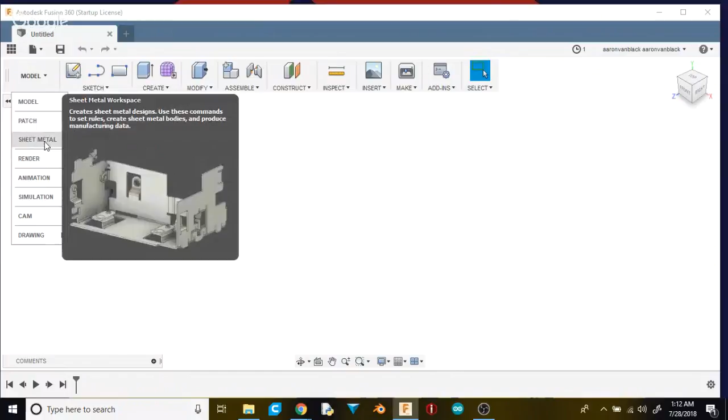Yeah, see, because I've got this up here that I would usually do if I do a new design. So let's see, nope, that's not what I want. I usually don't do any other thing except for usually just making stuff in Fusion. So I'll go ahead and create a new sketch.

This over here. Sketch, yeah. All right, I'm hungry, sorry. What's wrong with that, baby guy?

I know you can have it set up so it should pop up between who's talking. I don't know if that's got to do with a weird setting. I didn't see it doing it before, but I haven't seen it that way to begin. So...

I stopped feeding him for a second. He was very happy, it says feed me. I do like being... my mum said she doesn't feed me too soon, she waited too long between mouthfuls.

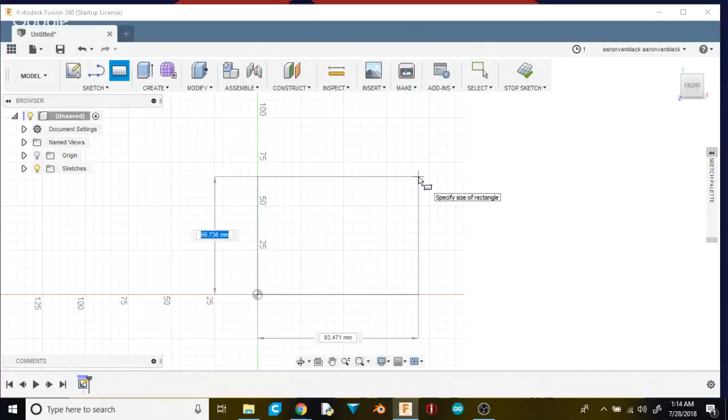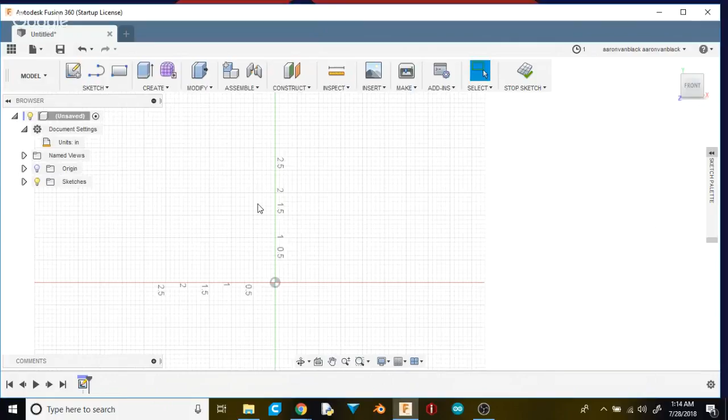Well, let's see, I don't have the dimensions written down. I actually had it in one of the previous ones. Well, let's change this actually real quick. I'm doing the right one, I can change it. from millimeters to inches, exact inches, there we go. All right, I'm gonna pop this up.

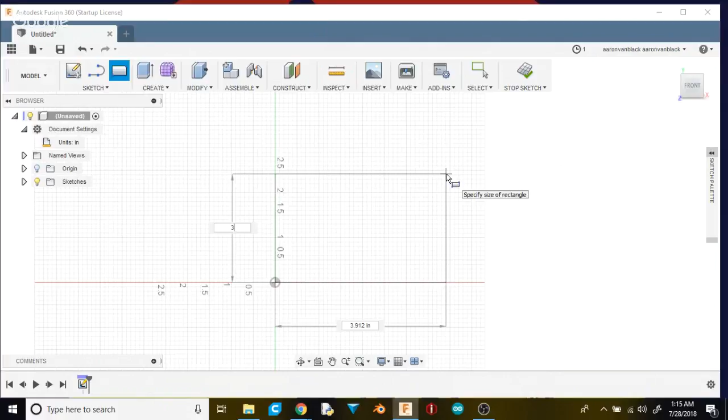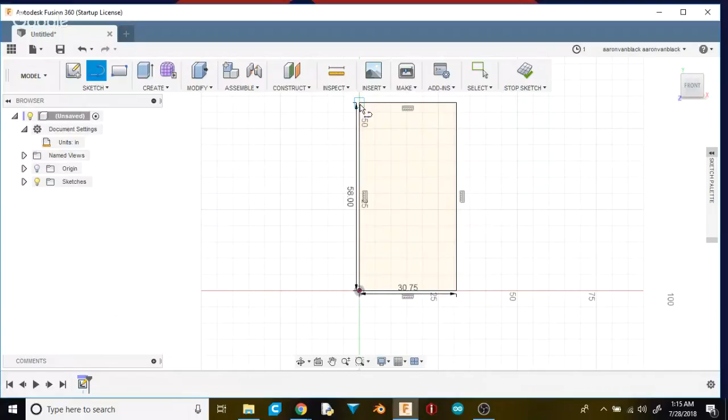I want, let's see, 50... just say 30 points. Back, one's 30.75. This one's going to be, it's called 58 inches. Now, just got to line over, 30.75.

Yeah, it's definitely weird for me to use inches with this because I've done so much of not using inches. I usually stick with millimeters, mostly because everything I make is a lot smaller. So anytime I go to make something bigger, I always use my phone or something and ask it how many millimeters this is, if it's bigger than my caliper can do, which I got.

Usually I don't do anything that big. So let's see, the highest I can go, this is technically 6 inches, but my caliper is a little broken, so I can't take it past that. There's a little piece in the back that came off, which I need to design and print just to have the piece.

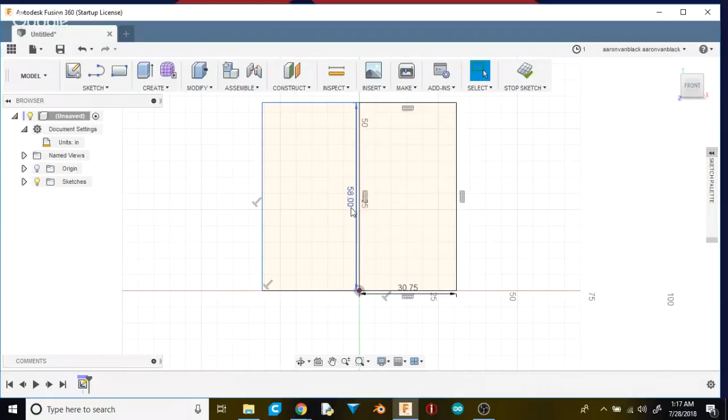All right, so I'm going to have this up here like that. Got it to the size I want, which looks a whole lot taller than what I'm thinking. So let's take it down to 55, make it a little easier.

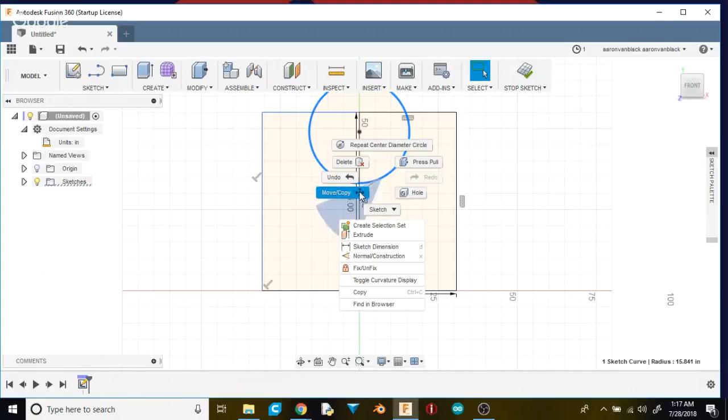One nice thing is hit C for circle, get on this center line, and let's do that. Tell it to move, and take it down to there.

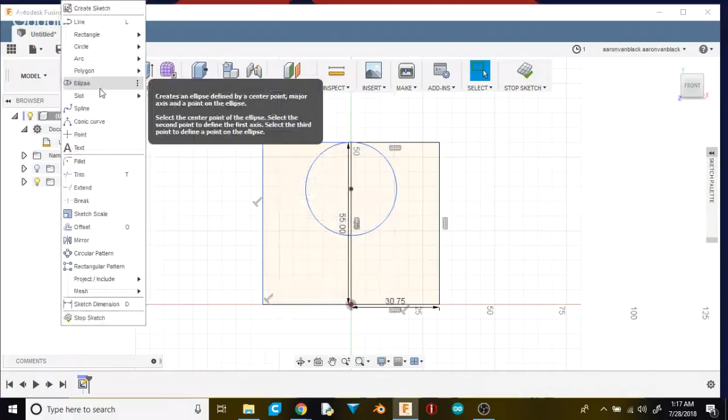Now, what I like to do is whenever I want to do some weird curves, I can either obviously do circles, or I go in and do spline. So I'll go in, click a couple of times, and find a spot to just connect with spline.

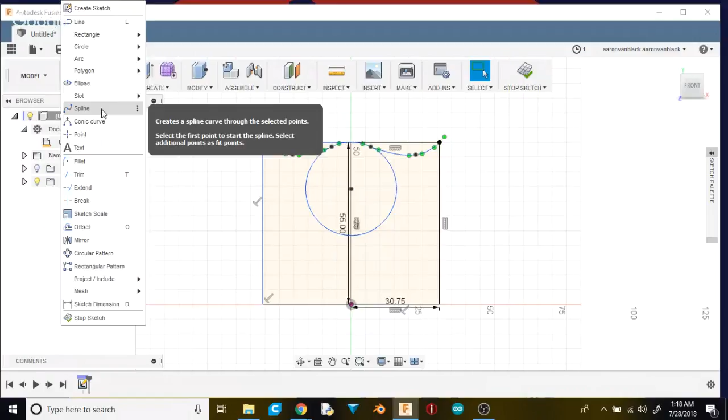Interesting. Yeah, it's pretty handy to do it that way sometimes, because often using spline handles can become a bit of a nightmare, especially if you're trying to do certain tangents. Yeah, I can agree with that.

All right, let's take this over 12 inches. I always like to do the same here, which is super nice that I can sit there and just— oop, that's not what we want. I hate when it does that. So usually when I go and add something and it moves, I tell it to fix. 12, there we go.

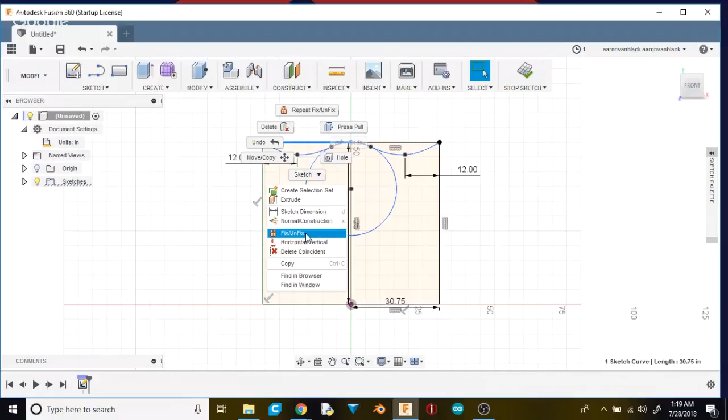Let's go ahead and just fix this and this. I know there's a whole bunch of different ways. Angus, if he sees this, he's probably just going to cringe at things I do.

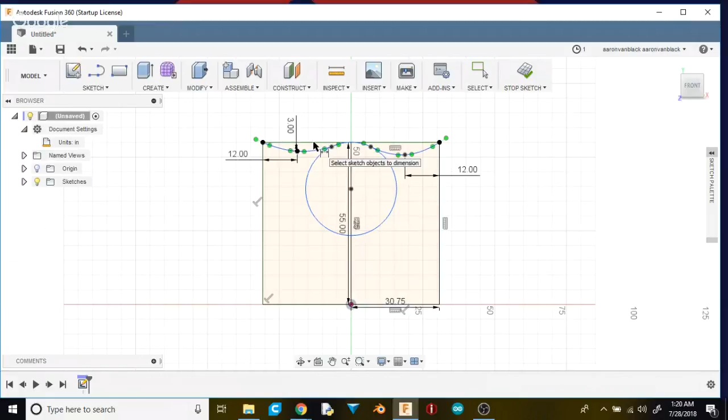But not all of us can be as good as Angus, so let's take this to 3 inches. I'm no expert when it comes to this, but all the stuff I do is very simple, and it might not reflect actual skill levels. You often do hear him say, you know, this is probably not the best way, there are other ways to do it, it's just the way I do it.

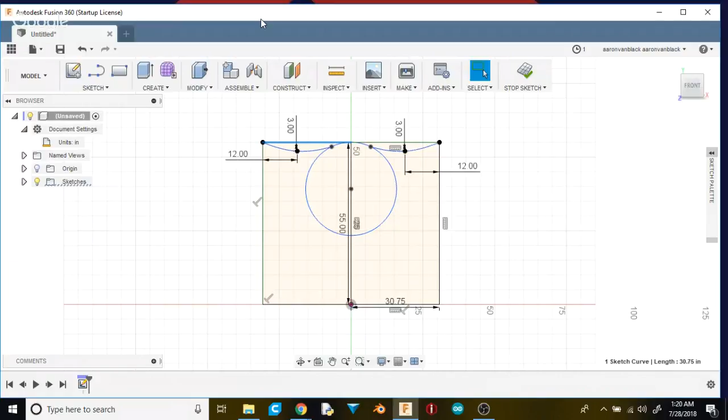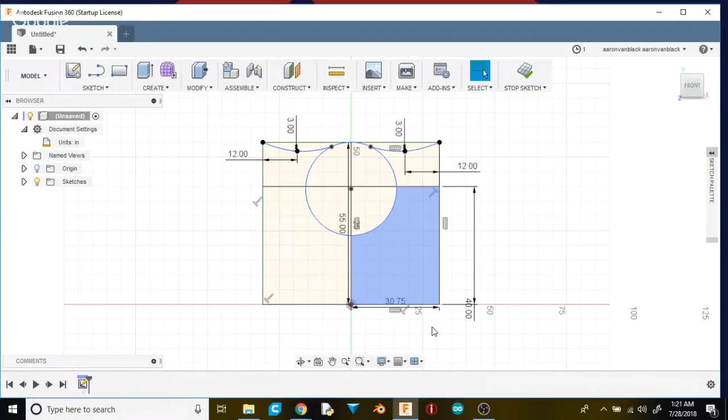Oh yeah, and there are so many ways, as we said earlier, to just do something in Fusion. So I think no matter how good you get at something, you're always going to find someone who's better. Yeah, that's why whenever Lars puts up a video, I always watch it. 90%, maybe more, maybe 95% of the stuff that he puts up, I already know, but it might just be 2 seconds of that video where I'll see him do something and I'll be like, holy shit, why haven't I thought of that before?

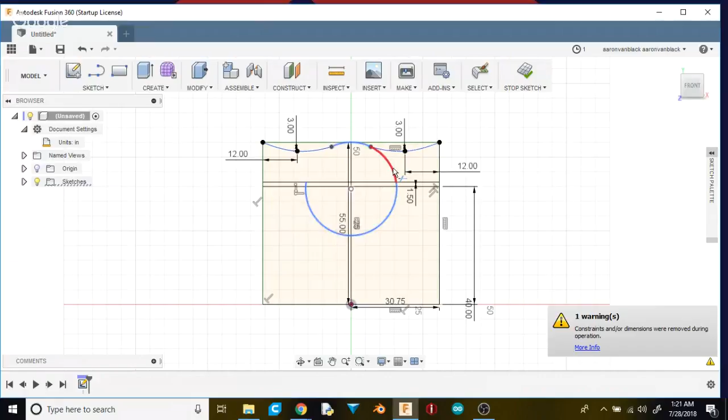Yeah, one thing that I had discovered that I hadn't learned, which was kind of nice to learn, is when you select something and say, I don't want everything, I just want this up here, guys.

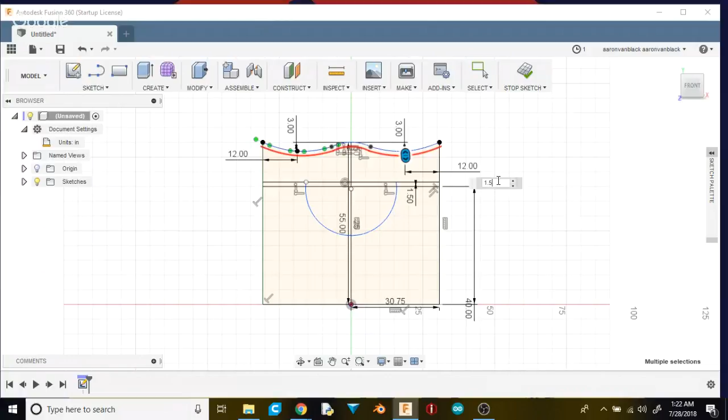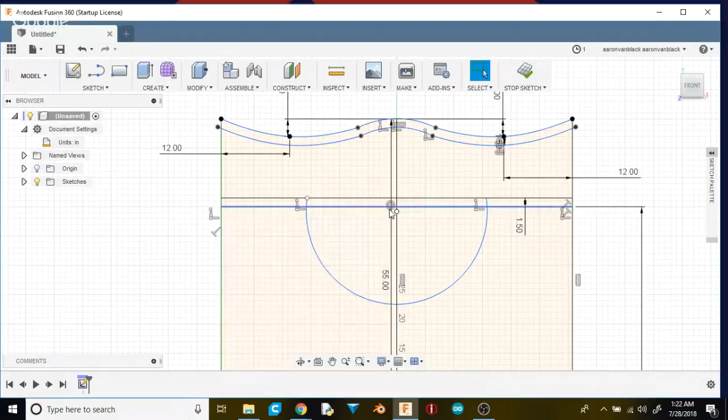I hit O for offset, and I just take it down. I'll select it, and it can give me the exact setup and distance that I want, which is super nice, because here I did a line straight through, but if I were to just select it and then hit O for offset, I can make that go a lot faster instead of doing what I just did with the line there. So that's one thing to kind of go through and try to remember for Fusion.

I mean, there's a whole bunch of different things that other people can do that not everyone can do, so I know there's that challenge to it.

Not everyone can do the exact same thing as the one before. One person can do it one way, one person can do the other, and then you learn something else.

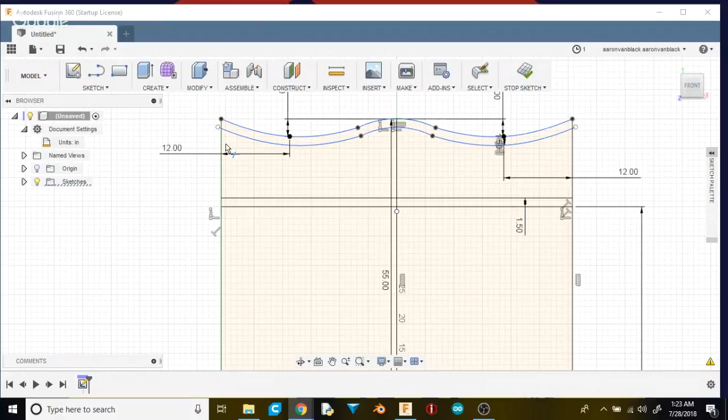One thing I've noticed with offset: if you scroll up, you can see right here this sticks out. I can hit T to trim it off, and it does it, but it's just one thing you've got to factor in when you're trying to do something.

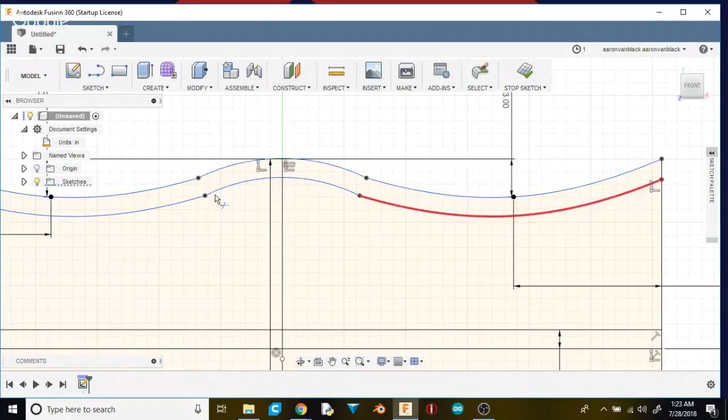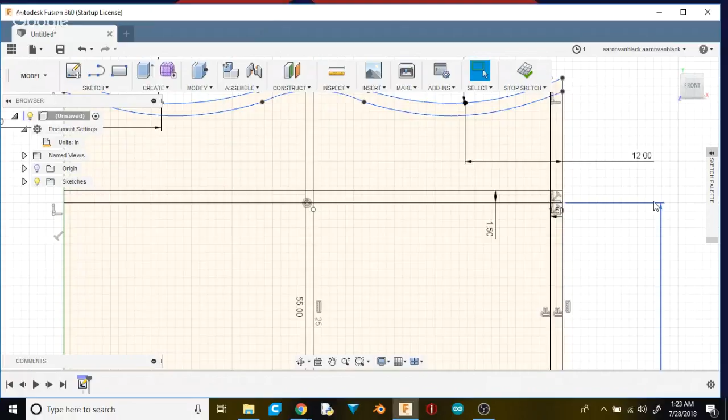It will. Like they often find the really spastic things that normal lines don't do. Just like that, you move it and it'll change shape despite the fact you haven't actually done anything. Yep, and I'll be damned if I can figure out why. And it doesn't do it on all of them either.

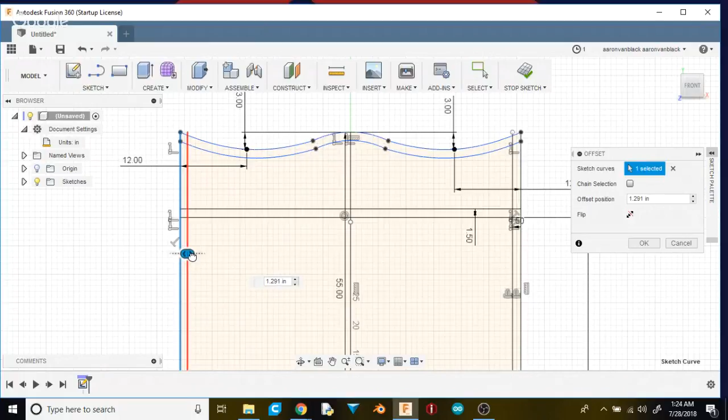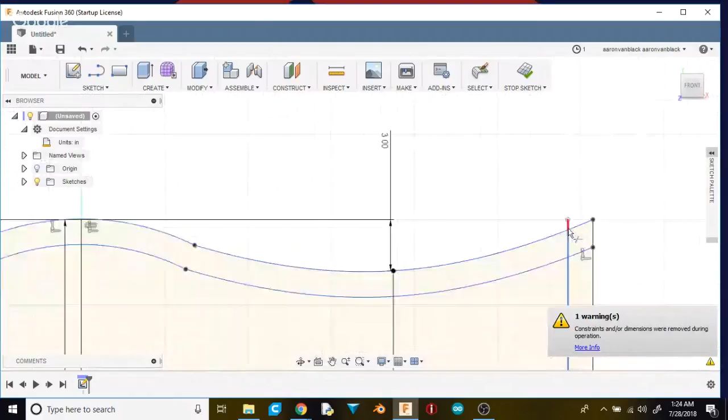Just occasionally. Like when I was working on my ring, I had this line that went from base to the hand and just arched down onto the top of the ring. It's only like a 3-point line, and only maybe 3 millimeters long. And I could not figure out why the sweep or whatever I was trying to do just would not work.

I figured out that if I went into the menu and changed the type of sweep from what it was by default to the other setting, which isn't what I wanted, it still wouldn't work, but then if I switched it back to the one I wanted, it would just instantly pop up.

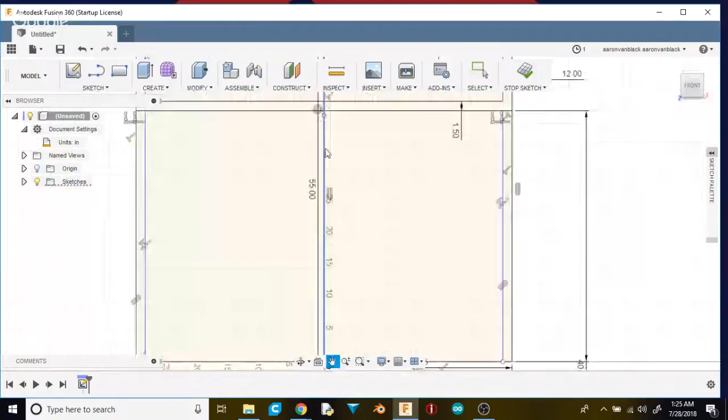And that took me like 3 hours to figure out. I'm like, why can't I switch this tiny little spline? All I had to do was switch the mode from what it should be to what it shouldn't be, back to what it should be.

I've had issues where I go and do something I've done before, and when I go to redo it, or if I messed up and tried to redo it, it won't work. Like for offset, it just won't work. I mean obviously it's working, but sometimes when I'm working on it, it won't work for me no matter what I do. It drives me absolutely nuts.

I just did this. And in Blender, I've had the same issue. This was years ago when I used Blender before I got into Fusion 360.

Another thing - in Blender they changed the interface from when I had started using it. This new update has tabs on the sides and stuff. We've got our stuff up here, but imagine everything being over there instead. You've got your tabs and you have to figure out how they drop down. Let's open Blender and I can show you.

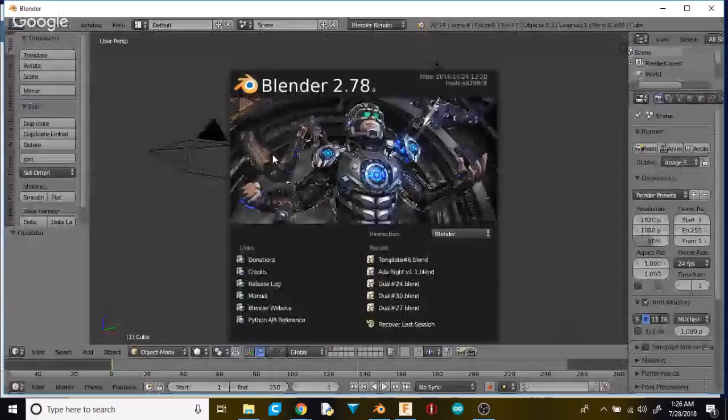See, here's all these here. You can scroll down, and this over here is pretty much the same, though there's a couple different things. There's all the hotkeys, and when I tried the hotkeys for this in Fusion 360, my brain was like, well, this button - no, this doesn't work.

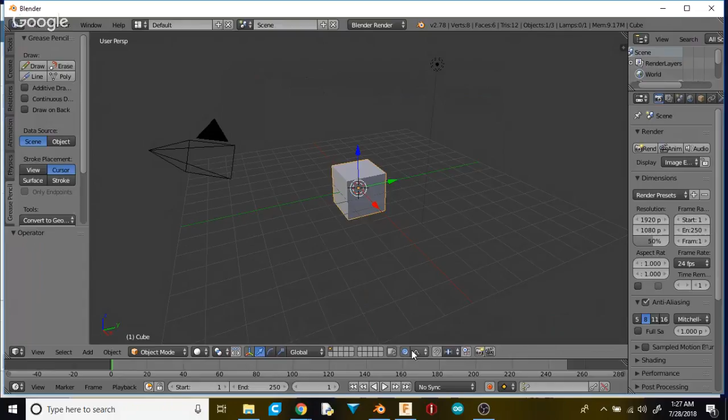Let's see, hit spacebar - this is what happens when I hit spacebar. Let's check Fusion 360. Exit there, spacebar.

Mr. Carrell Science, I think your baby's getting way too into this tutorial. Teaching them from a young age. There you go. Show me those fillets, baby. Oh yeah, stand for it, mama. I'm glad I'm not monetized. No, it's okay, it's a real thing.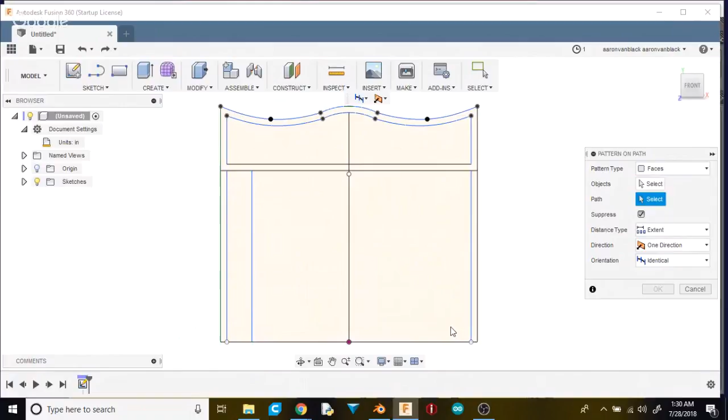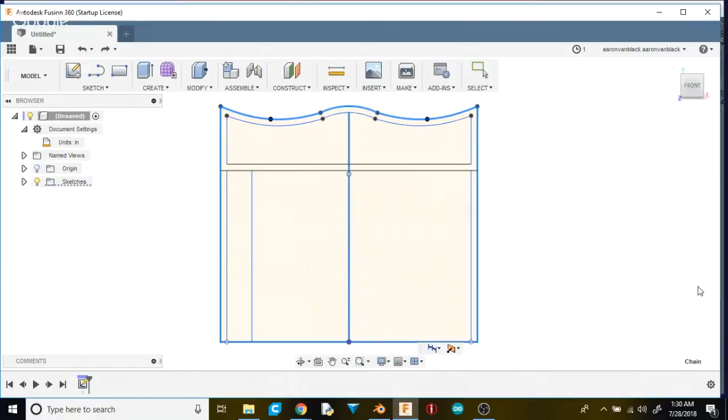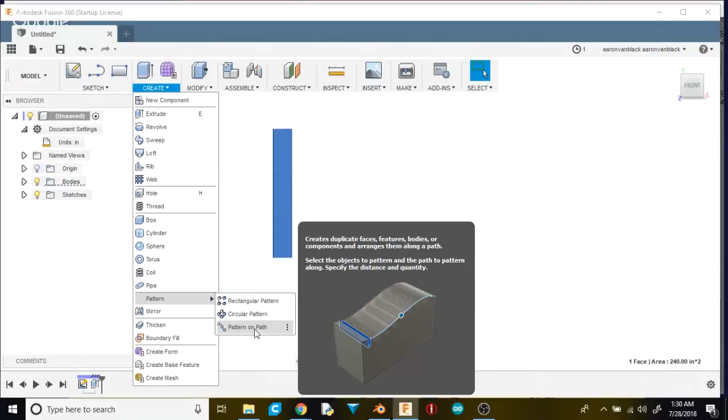I did it on a path. The one under the create menu won't work in the sketch environment.

Sketch. You said line? Rectangular pattern. Right out of the line. It's a rectangular pattern, grayed out, right down the bottom.

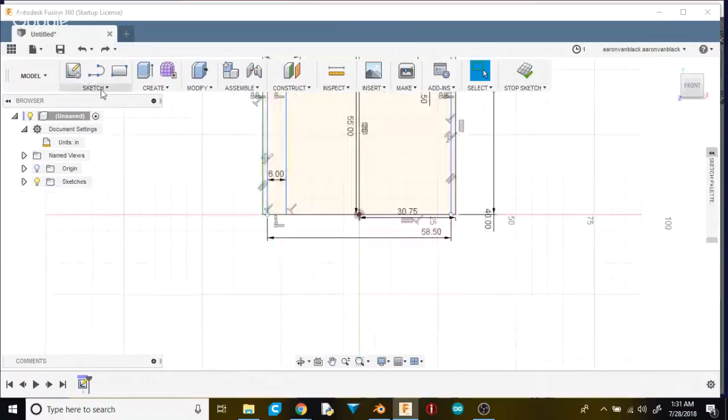No, like at the bottom of the main menu. Almost there. Okay, yeah, let's sketch environment with that one. Remember you sketch there.

The other ones under create don't work, and I fall for that all the time. I'll go to like fillet at the corner in a sketch and I'm like, what, isn't this working? The model fillet tool.

Increase my count, should be close to 10. And I think this isn't... yeah, that's way too small.

8. No, that's still too big. All right, let's put that. No, let's try.

What's that? Formulas, very much - no, a lot of it is I go through and trial and error. Usually depending on how big of an area I want, I'll just see what it's going to do. I usually play around with that, then the sudden realization that I can just do the maths to calculate the exact thing that I want, and I'm like, I just wasted 15 minutes playing around with this to get it exact.

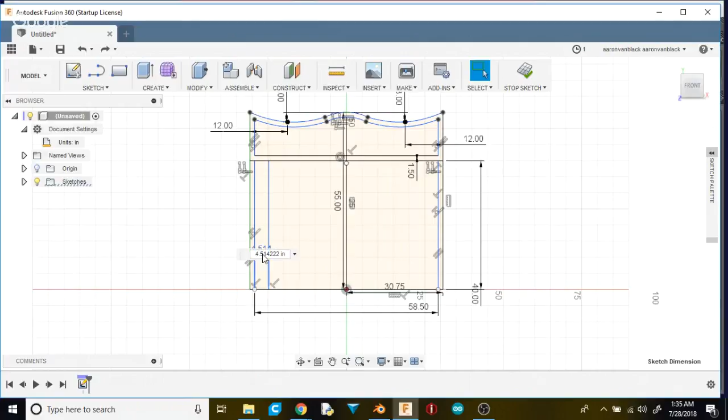So let's see, that's a lot of things that I go through and do. I'm trying to figure out how big one thing should be for this, if I'm going to add something, then just kind of see which one's going to get me the closest to it. So let's go.

Add 9. Yeah. It looks fairly close. And I know they're not the same distance just by looking at it. Yeah, it's 5, so let's see. Change that to 5.

But then that's changed there, so then I gotta go back. So let's go. This one's coming in handy in that situation just this morning, trying to remember what the hell it was.

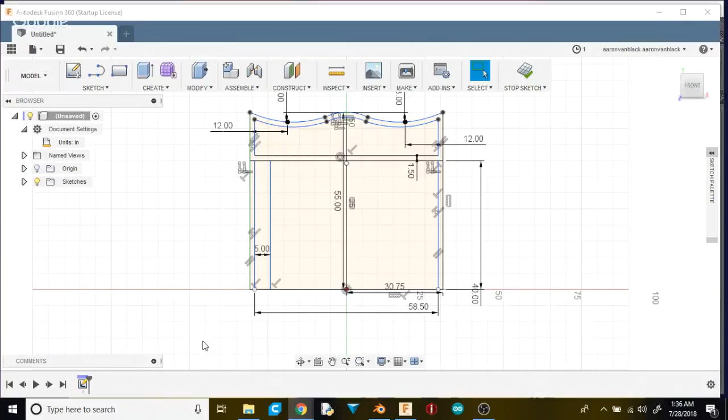So why don't you just make that first one 5.85? You're going to do 10 of them. Yeah, well, and then do your pattern and just do 58.5 minus 5.85, and then set that as your distance when you draw your pattern.

9 more. And then when you draw out your pattern to the distance, do 58.5 minus 5.85, and you just manually type that in as your distance.

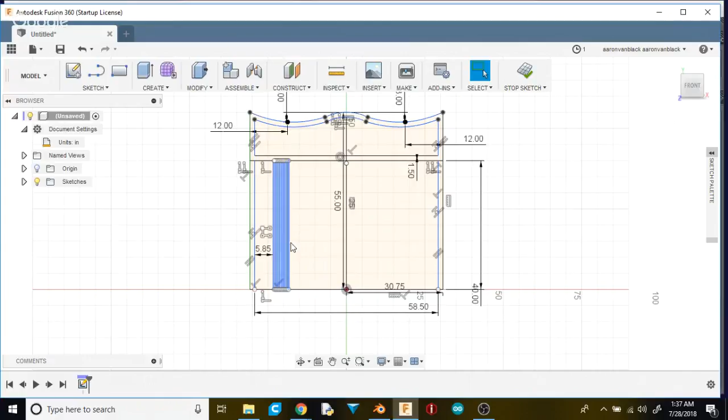I know, I just screwed that up. All right, let's try that again. So, 52.65.

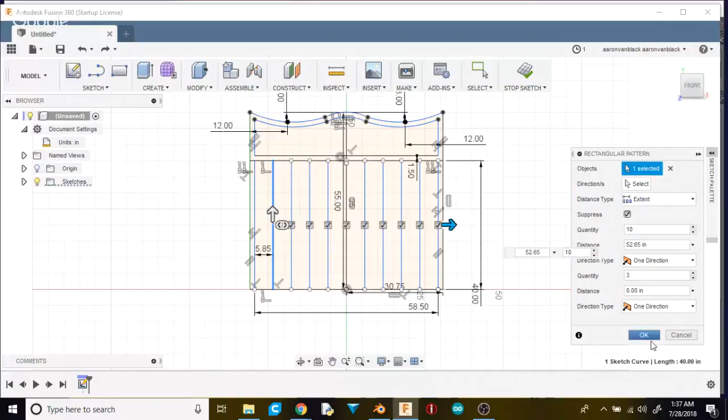Let's see. Yeah, good.

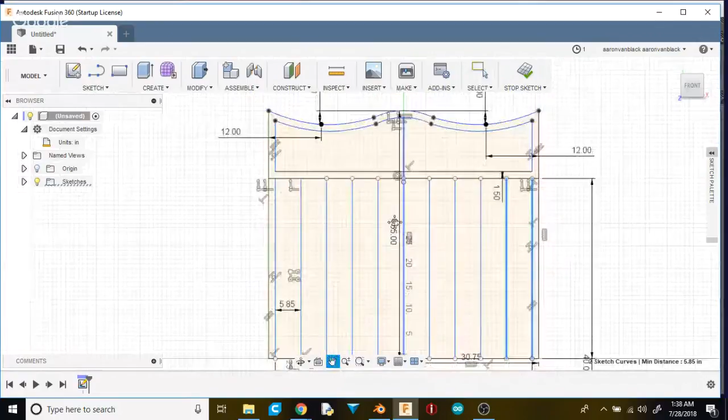Section, and it kind of automatically applies that to subsequent sections.

Let's see, I'm gonna select, shift, every other one, extrude that 1.25 out.

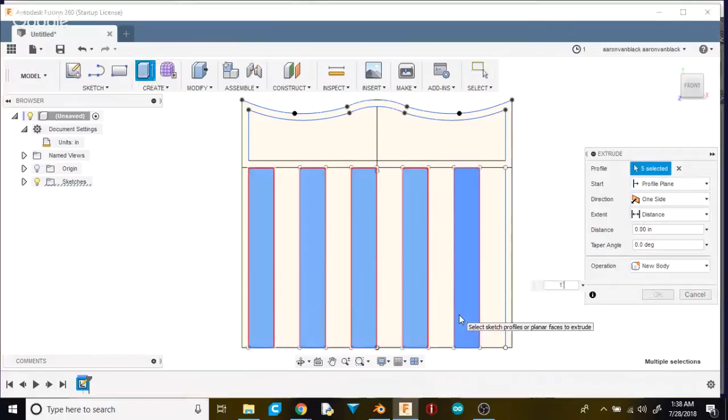So I'm gonna go back and edit my sketch. Extrude that 1.5.

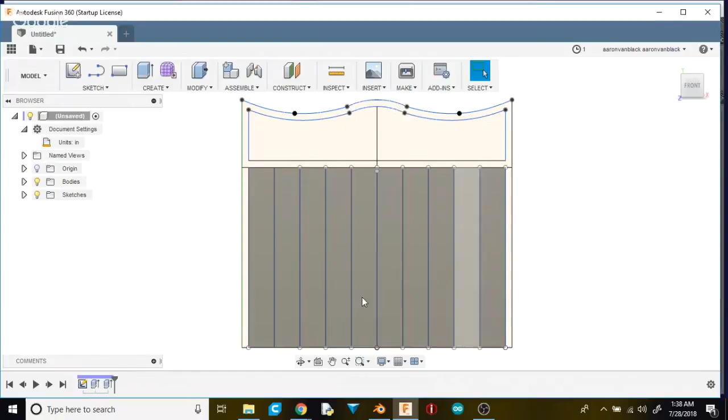It kind of does, doesn't it? All right, let's see.

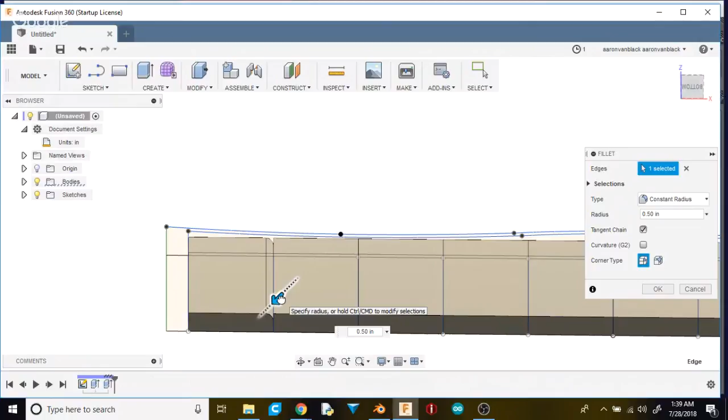I was thinking more Transformers. Yeah, see that. Kind of funny how people see different shapes, or the same shape, like when you look up at the clouds. Yeah.

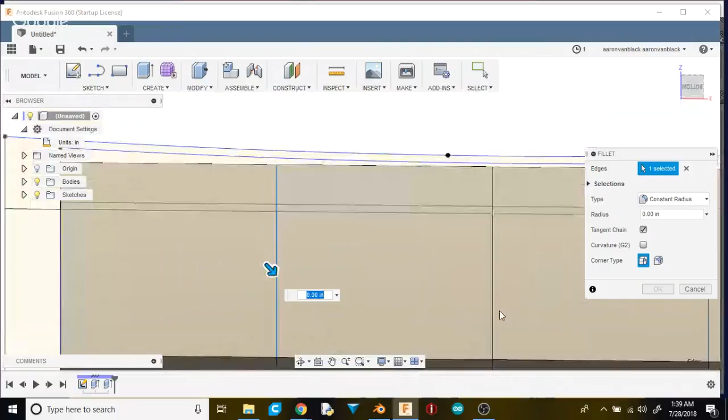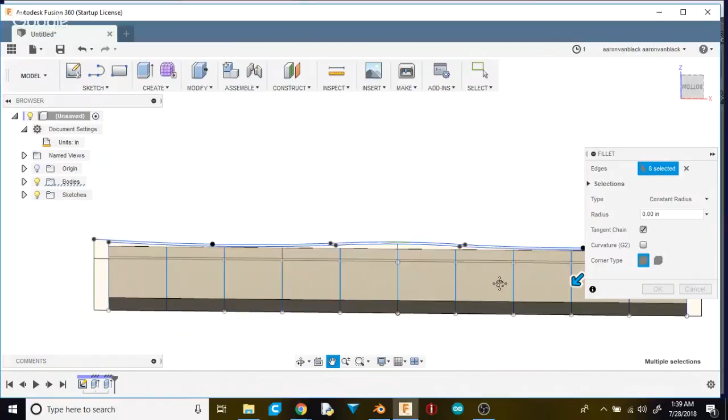Yeah, but as soon as somebody says, oh, I don't know, I see that, you're like, oh, totally. Then when people say that, oh, I see that in that cloud, you're kind of like, really?

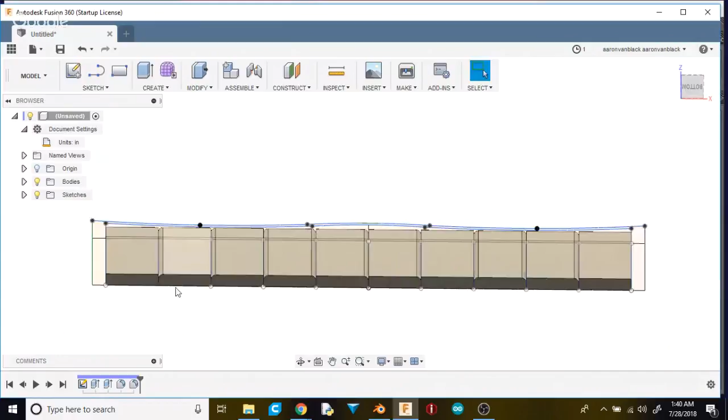All right, so fillet again, and I know there's some other way to get this done a whole lot more efficient than what I'm doing, but see, like right here, it added a fillet, and I didn't want that fillet there.

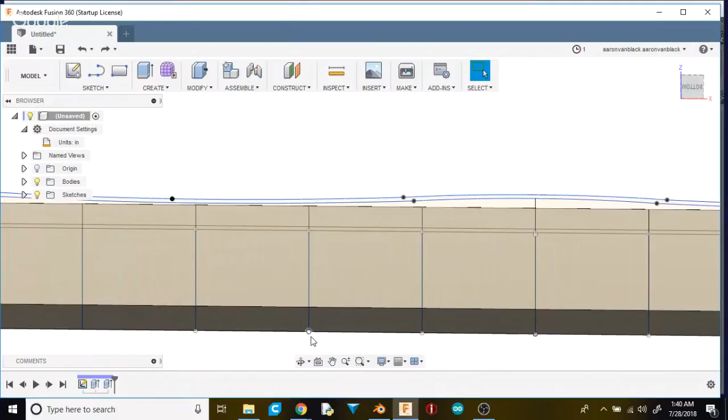There we go, let's go fillet. Just want the top part, just tend to uncheck the tangent chain button. Which button you said? Tangent chain. Tangent chain.

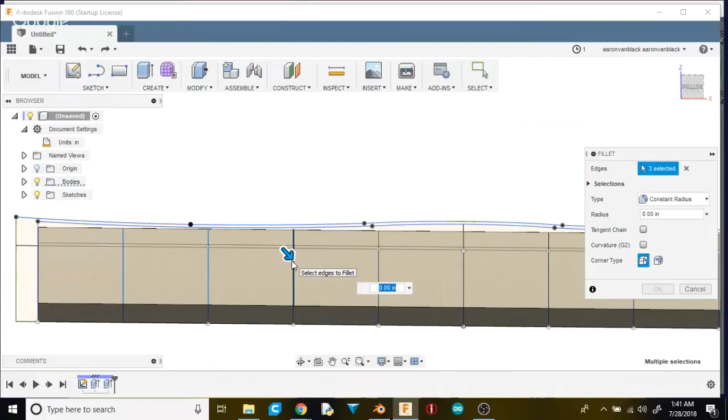I'm looking, my brain - I've been going on like 3.5 hours of sleep right now. So, the ticked box, okay, that'll only select one edge rather than all the edges. Okay, well, let's try that again.

And see, there's a lot of things I obviously still don't know. It's like I run across something and often you don't really know those things because a lot of the time you go to select something and select that.

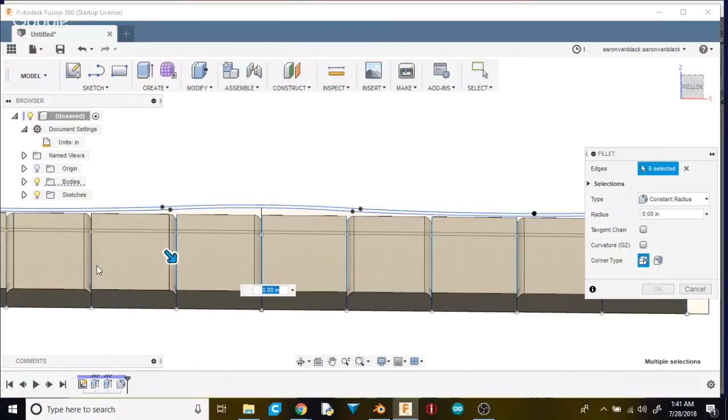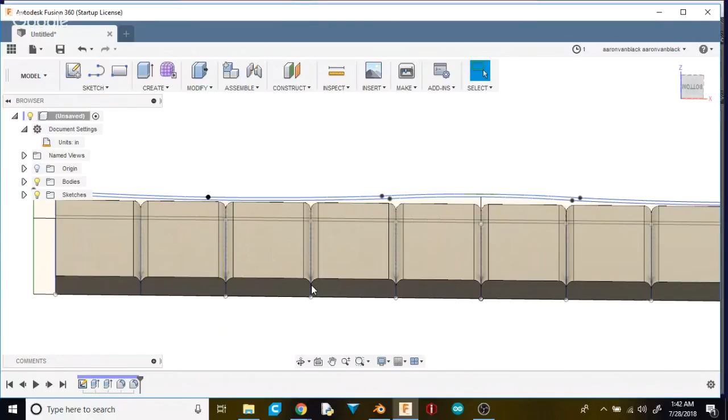Oh yeah, you never needed to not select a part of something, you never even think to uncheck. Normally if I do something close to this, I usually sit there and have a gap, look in and do my sketch so there's a couple millimeters apart from it, not have this entire thing going through like that. So there's that, look at it.

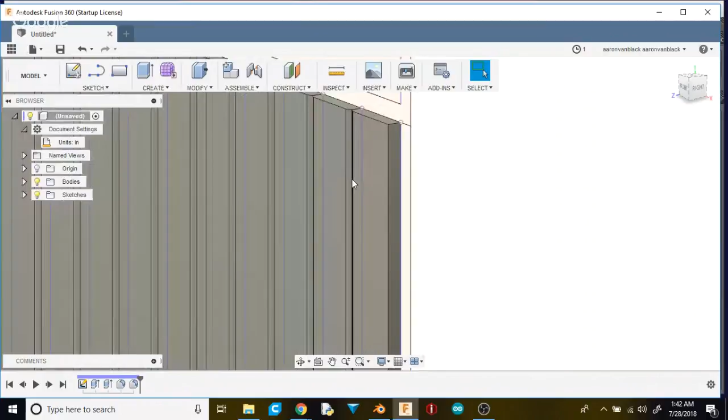See all that now. Oh, that's good. So let's go front view. I don't know why, but for some reason that just made me think of

Tim the Toolman Taylor talking to Wilson over the fence. Oh, that's funny. That's a memory I never thought I'd have again. Glad we can make you relive that moment.

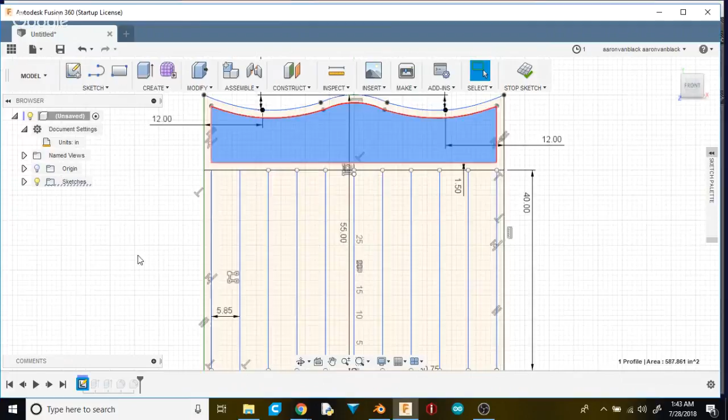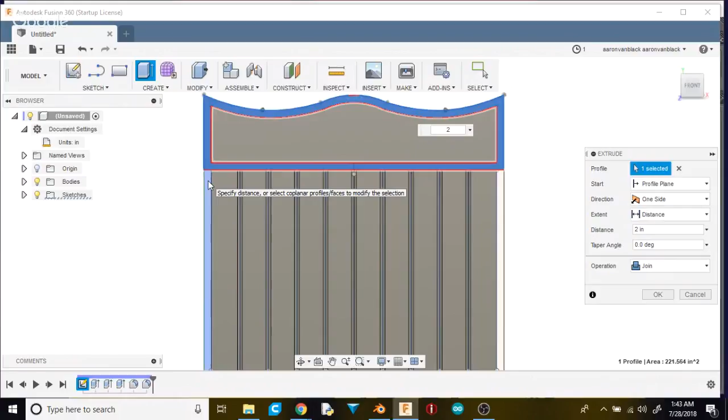Have you ever delved into some parameters? Oh, possibly. There's a lot of things I've done and not done, can't quite remember everything that I've done.

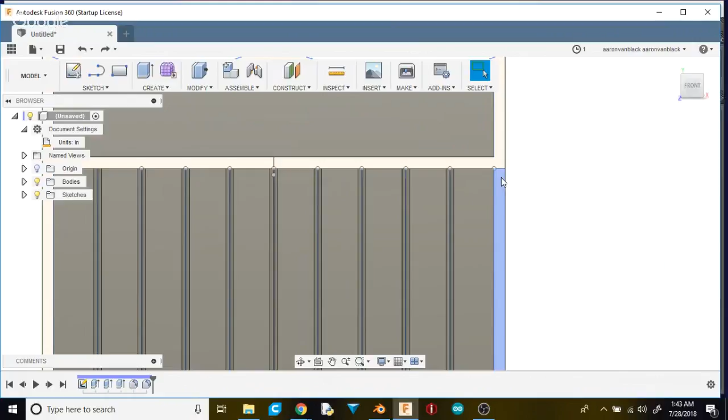No, I want that. I'll edit sketch first, I guess. That's not allowing me to do what I want to do. There we go, now extrude it. Take that out 2 inches as well.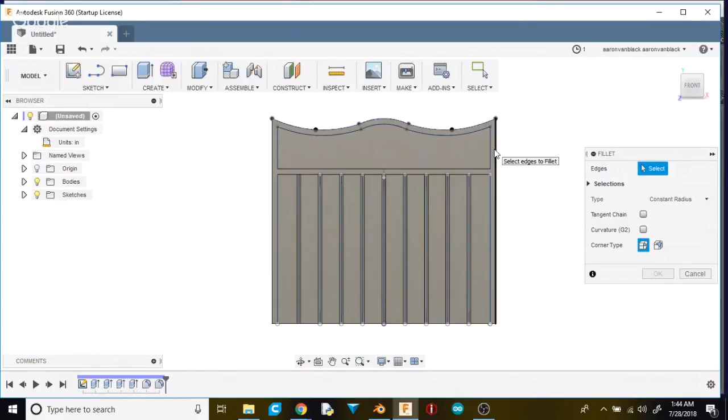So yep, that was my wife texting me. Sounded like a tweet train.

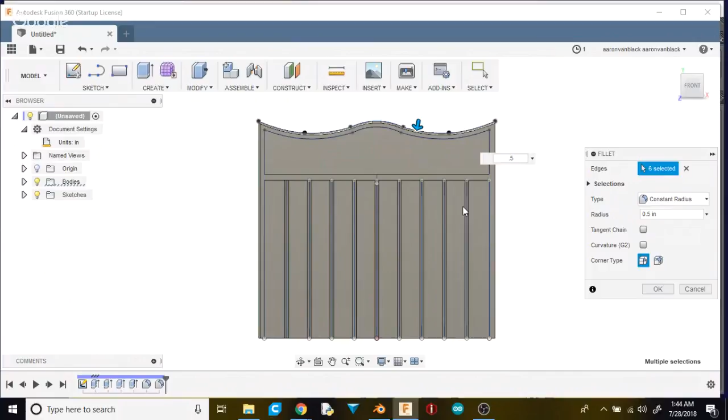Let's go 0.5. Select that side, 0.5 as well. That will take that as a

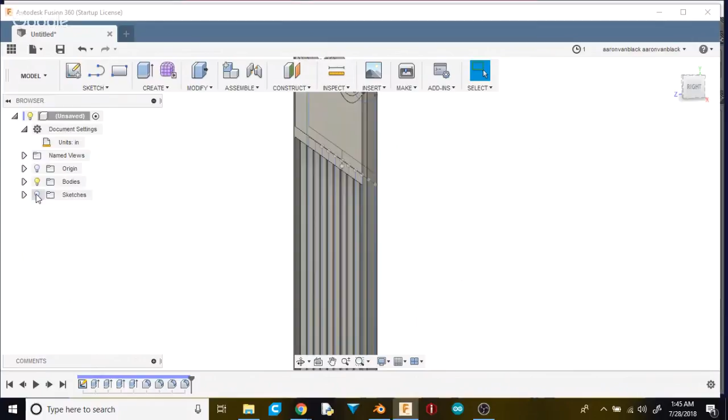quality I came over the other day as well with the fillet. I had this line, and like over the entire model, I've been applying G2 curvature fillets. One line would not do it, but it would do a G1. I have no idea why.

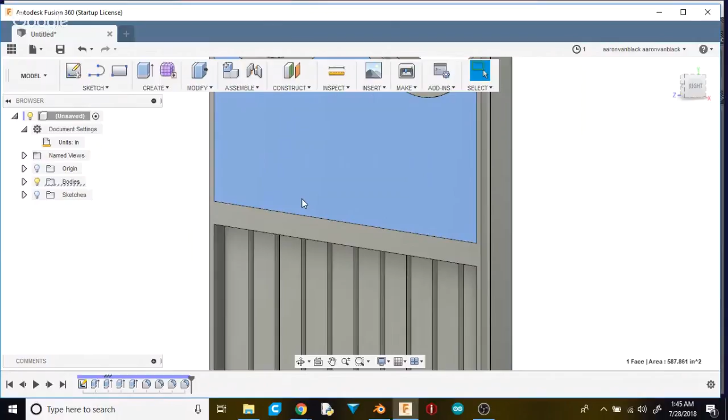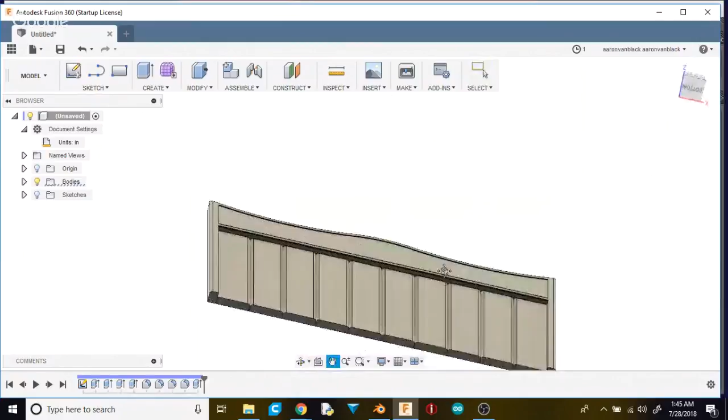Yeah, some things can be super odd when you're trying to get things done. It's not too bad.

It's fairly close. So what is this that we're actually modeling here? So this is actually the crib that I've been designing. So it looks like a bed. Yeah, that's the back of the crib.

I've got the front that will go here, it will kind of have somewhat of this design, and then there's the sides. So I've looked at a couple different cribs and how they all kind of flow, and taken a couple different ideas from that, and then some actual doors, so how those actually go and move around.

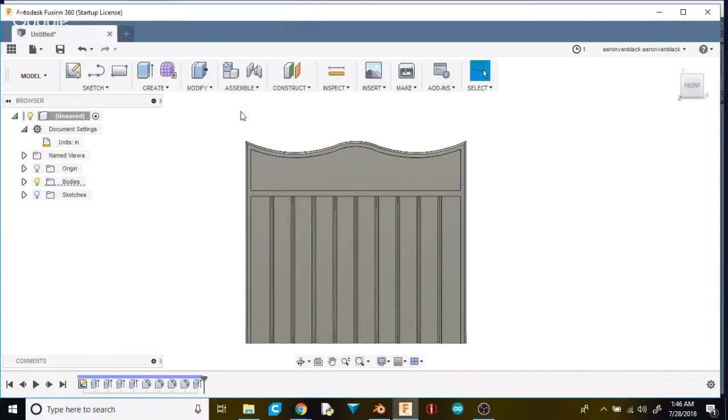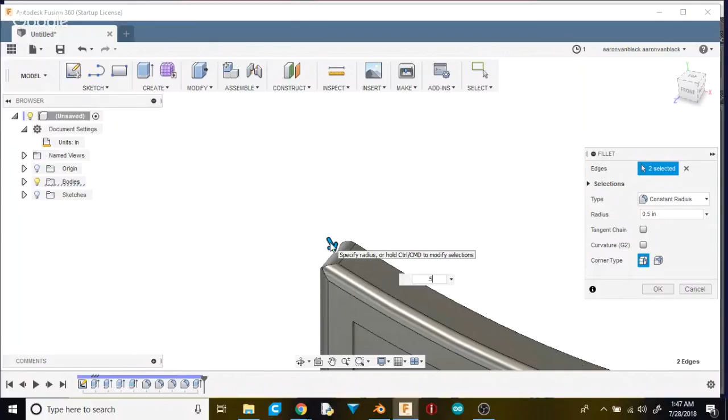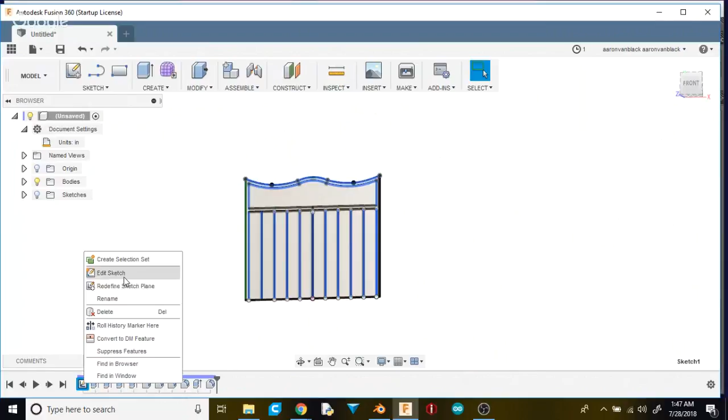And the nice thing about 3D modeling this is I can go through and set my dimensions and everything that I have. If I go in and edit my sketch,

I got my dimension here for how wide my board needs to be. Now this one, let's see, dimension from here. So you get a 2-inch board to go for here. Oh, there you go.

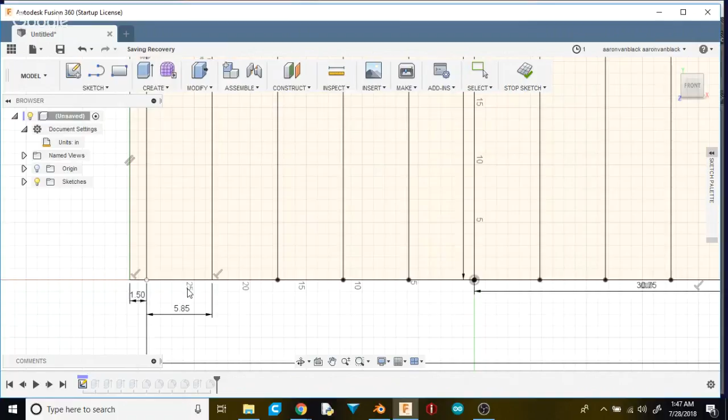And then this one's got to be about the same thickness, so you do somewhat of the same board, but also stop my sketch. I've got this extruded, 2 inches out.

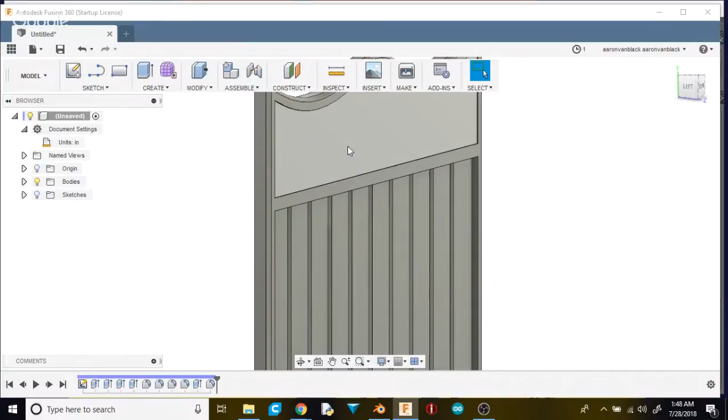So this is cut and then use a router on it. And then this piece I can have extend forward more, or the same size. I mean, there's a whole bunch of different things I can do for that.

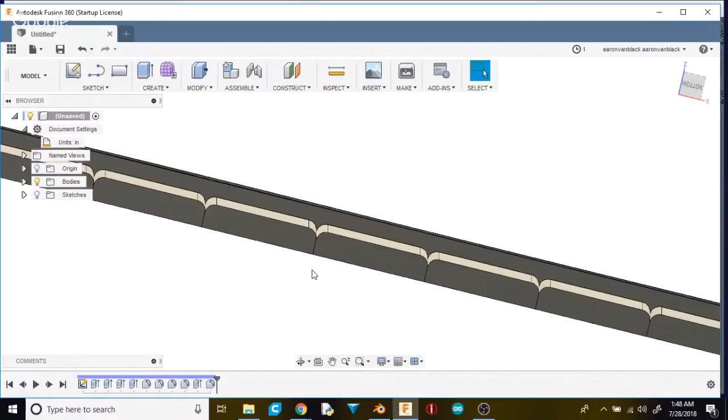But then these ones, I'm just going to take a router to it and just kind of round over the edges. These are going to be individual boards, which I can have the same length and just kind of get them all stuck together and have it work properly.

There are round bits actually that shape on there. What's that, like router bits shaped like that kind of? Yeah, you can get different router bits shaped different ways. So I need to pick some up.